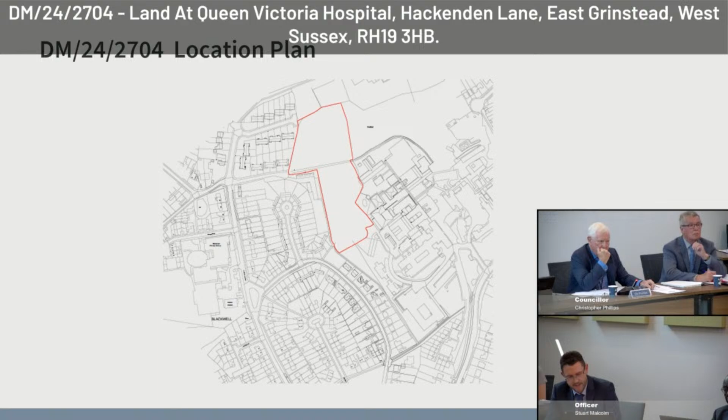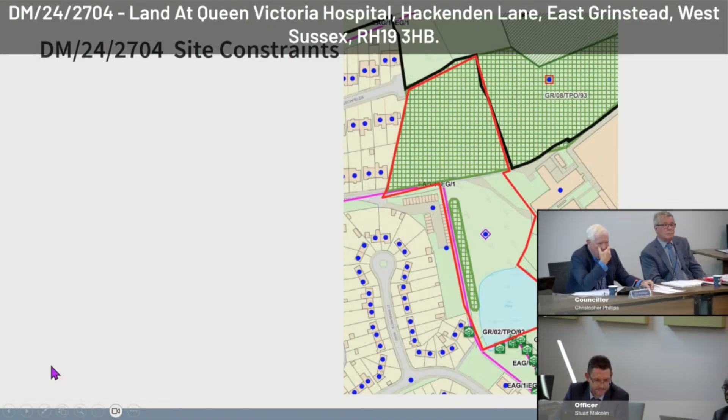As members will have seen from the report, of fundamental importance to the determination of this planning application is the fact that the site forms part of a site allocated for housing. Policy EG8 is a saved policy from the 2004 local plan, so it forms part of the district plan and the development plan. This allocates the land shown on this plan for approximately 40 houses.

Members will be aware that planning law requires decisions to be made in accordance with the development plan unless material planning considerations indicate otherwise. It's also important to point out that this application for 36 units does not cover all of the land subject to the allocation of 40 homes.

The garages referenced a moment ago, just to the west of the application site, and the open space immediately to the south, are within the EG8 allocation, but they're not within the current application before you.

This plan also shows the land to the north as being within the defined countryside, beyond the black line there. To the east is the area covered by policy SS6, an East Grinstead neighbourhood plan policy related to the hospital, which seeks to ensure new development does not prejudice the desire to protect the hospital, whilst also supporting new hospital facilities.

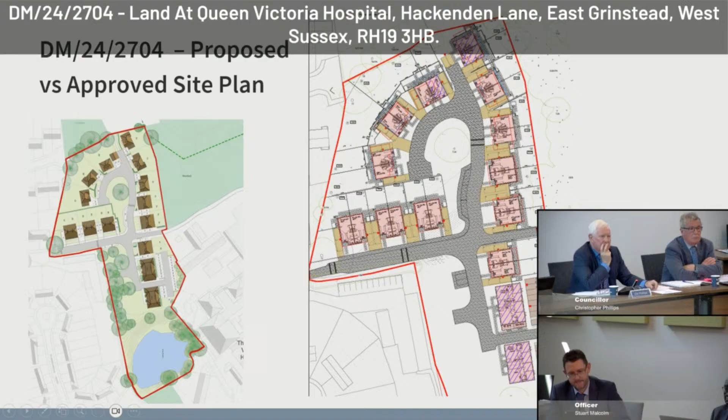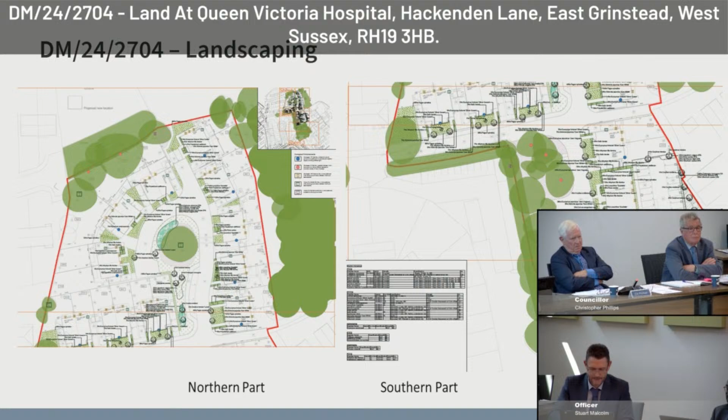The council's ecological consultant has confirmed that the applicant's BNG submissions are acceptable, and the relevant provisions to secure this will be through a combination of conditions and the legal agreement.

The same consultant has also confirmed there are no objections in respect of the impact on any protected species, with precautionary measures, mitigation and enhancement being secured through condition.

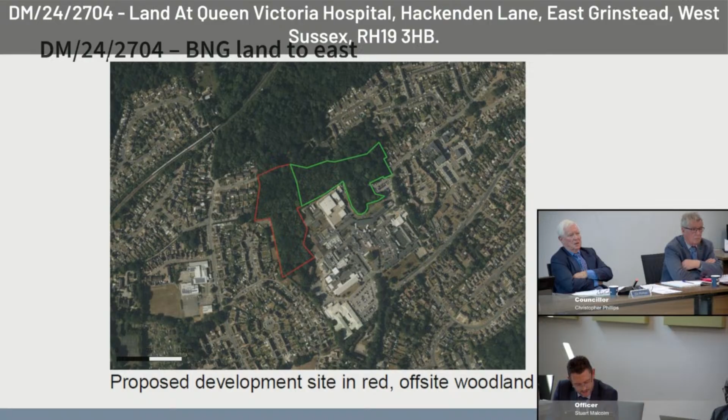In terms of the on-site enhancements, these include bird and bat boxes, the installation of bee bricks and insect towers, and some hedgehog-friendly fencing.

Just moving on to highways matters, which are obviously a key issue for members to consider, particularly bearing in mind the comments from the locals, which are clearly quite contentious in that respect.

As with the previous application, and again evident from the representations received, the highways impact is a major issue for local residents, with much of the concern focusing on safety impacts on roads in the immediate vicinity. The application submissions have though been robustly assessed by our highways colleagues at West Sussex, who are here today, and they have visited the site to see the access arrangements themselves and the local circumstances.

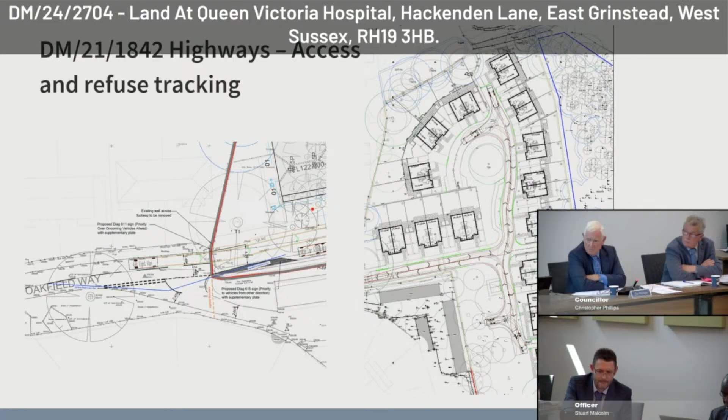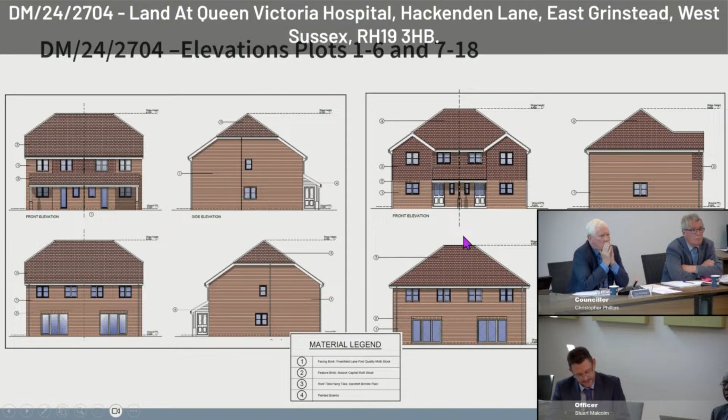Just got a few elevations now to show you, I won't take too long on these. Starting with the houses in the northern part of the site, which are plots 1 to 6 on the left and plots 7 to 18 on the right hand side. These are all 2-storey in height.

Next set of elevations show the remaining semi-detached houses in the southern part of the site, plots 19 to 24, and the apartments - this is the southernmost of the two 3-storey apartments. As before, in terms of the materials, a traditional palette is to be used with Freshfield Lane brickwork and plain tiles on the roofs and at the first floor on the apartments.

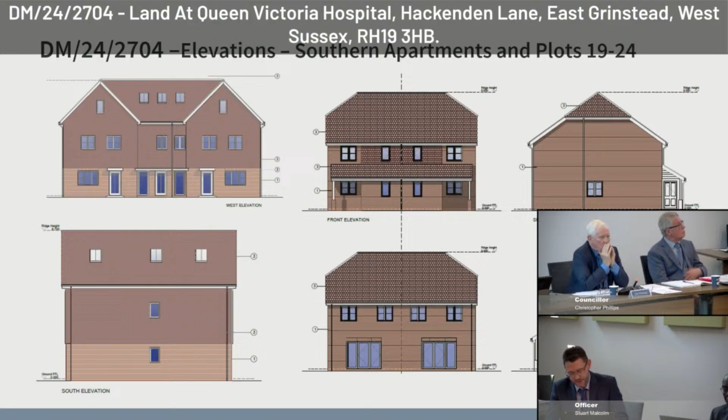Overall on design, officers consider the scheme is at least equal to the previous scheme in design terms. In terms of residential amenity, the applicant has designed the scheme to respond to the neighbouring properties, and they're designed or located far enough away to ensure that significant harm will not occur through overlooking, loss of privacy or loss of light. This is the same conclusion that was reached under the assessment of the previous application.

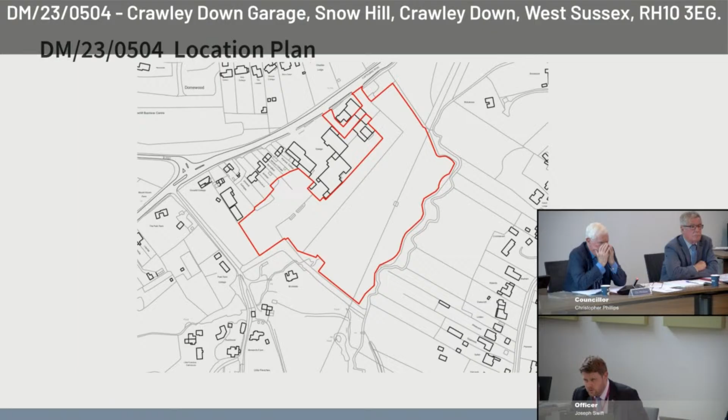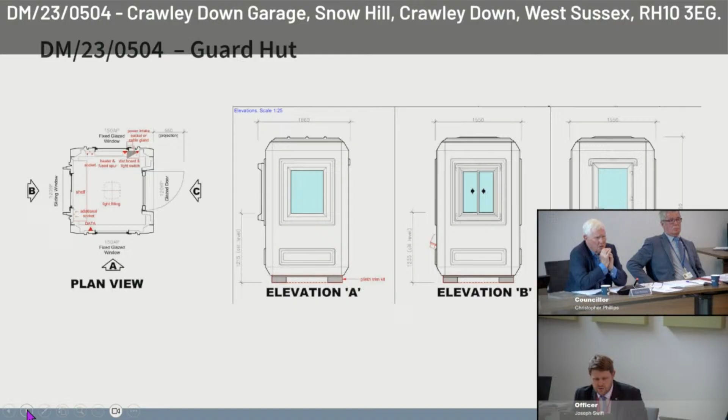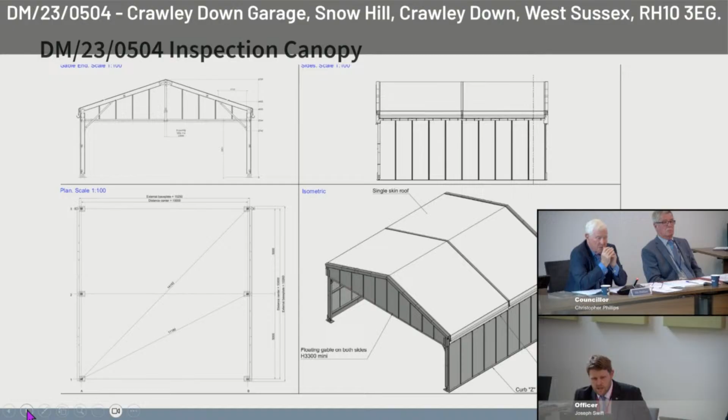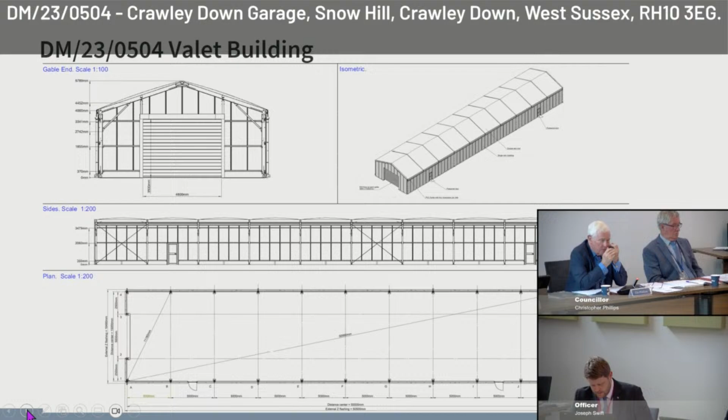So there are a number of temporary buildings on site, so I'm just going to quickly run through these; I won't spend too much time on them. The first one is just the guard hut, located at the site entrance. We have a small modular office located on the site, a toilet block, an office unit, the inspection canopy, the imaging unit, the largest of the buildings which is the valet building, a wash bay, and the container building. You will note that all of these buildings are very temporary in their nature.

The permission is only seeking consent for a 5-year period, and in accordance with condition 2, once after that 5-year period, the land is to be restored to its former condition or to a condition agreed with the local authority.

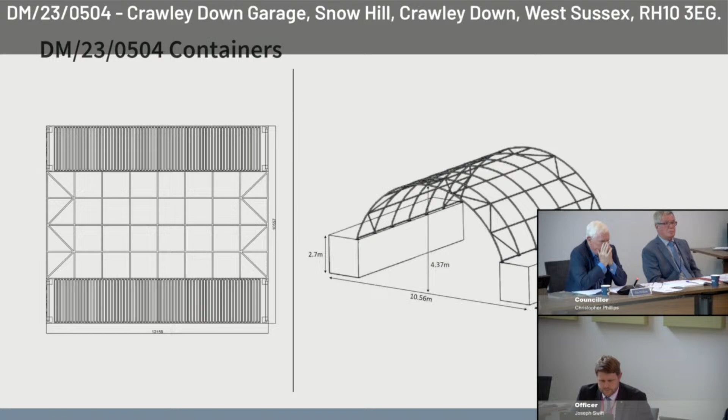So the main issues are set out in the report. The proposal would support economic development and redevelopment of a previously developed site, and this is considered acceptable in principle, and it's in line with policy DP1 and DP14 of the Mid Sussex District Plan and policy CDNP07 of the Neighbourhood Plan. The design, layout and scale of the development is considered acceptable.

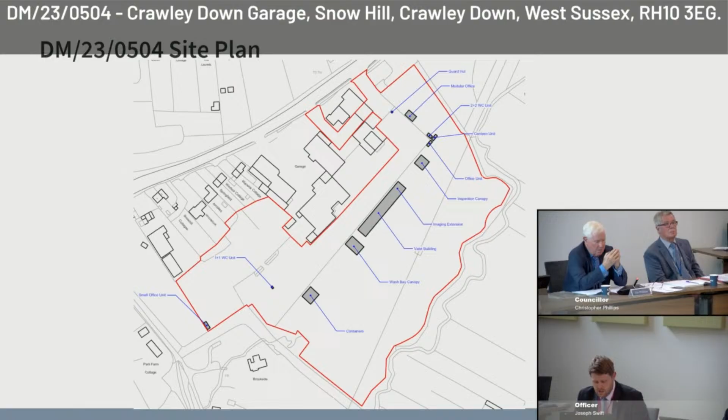In addition, lighting is existing on site. We have put a condition on to restrict the hours of use, which is considered to result in an improvement over the existing and an improvement over the existing impact on the wildlife on site.

We've got no objections received from West Sussex Highways, the Environment Agency, the Environmental Protection Officer, Contaminated Land, and the Council's Drainage Officer. It is therefore considered that the proposal is compliant with the development plan when read as a whole, and it is recommended that permission is granted subject to the conditions set out in Appendix A.

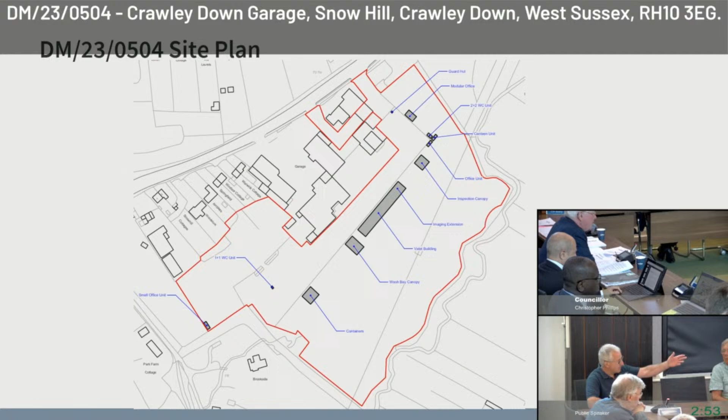So when you're ready. Good afternoon, committee. My name is Paul Morley. I live in a property called Brookside to the south-west of the development, immediately at the bottom of the plan that you can see there. I am registered to speak in opposition of BCA for the proposal of Crawley Down Garage.

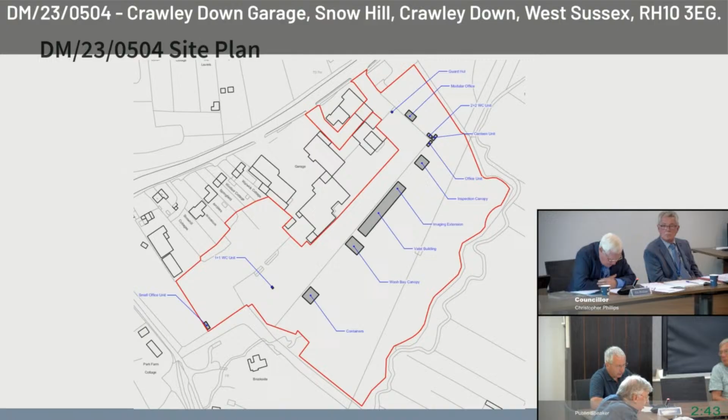However, I wish to make it clear that I'm not objecting against the Crawley Down group as a whole. The existing business has demonstrated responsibility with some immediate neighbours, engaging with myself and the local community, and providing local employment and economical benefit. So unlike the BCA, Crawley Down Garage is not a faceless corporation. Rather, they have established a locally established entity, which in my opinion has worked to maintain a fair relationship with its neighbours. So I'm not against them.

My concerns are antisocial noise. I know that's not a direct concern of the planning, it's more environmental, but under DP 29, the proposal of the site is to hold approximately 2,000 vehicles and employ around 32 staff. There will be a significant turnaround of vehicles, raising concerns regarding persistent noise pollution, car alarms sounding repeatedly throughout the day and night, creating continuous nuisance, disrupting the lives of residents.

By comparison, 2,000 cars is equivalent to a small village such as Turners Hill, where residents could reasonably address one another if there was a disturbance with another neighbour directly. However, with the BCA and the scale of the operation, this is neither practical nor possible.

If the committee will permit me, I would just like to play you a couple of audio tracks. No, sorry, we can't have audio tracks.